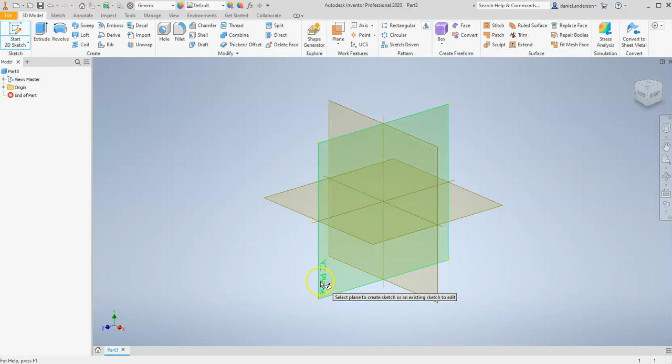So let's click on our New button and go to Standard Part. And once we're in here, let's click on Start 2D Sketch. And this time I want to start on my YZ plane or my side view plane. And I want to select my circle tool.

And I want to lock it right onto the center. I want to make it coincident with the origin. So you want to make that green dot happen. I'm going to click and drag, but I'm not going to click again. Instead, I'm going to type in a diameter of 1.5 and hit enter.

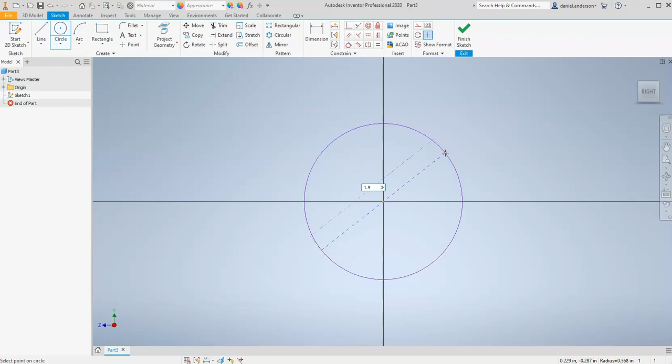And you can see that my circle is fully constrained already. I told it its size and I told it where to always be. I'm going to hit escape on my keyboard and I'm going to add one more thing to this circle. I'm going to find my line tool and I want to create a line that goes from top to bottom

across this circle. Now, before you click, if you let it hover, you'll see that little yellow dot sort of move in to a certain point in the circle. We call that the magnet feature. It's magnetizing to the top point of this circle. Make sure that you get that yellow point stuck to that and then click and drag down.

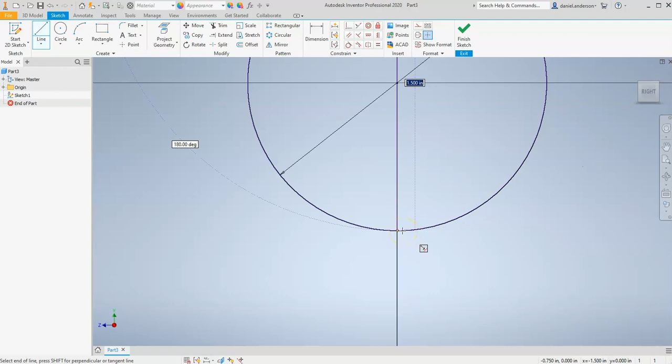And I want you to do the exact same thing at the bottom. It's very important not to let it go below and click. I want it to magnetize to the edge of the circle at the bottom and then click. And to center it, I'm going to click on my right view. And you'll notice that this line is not constrained.

So I'm going to hit escape on my keyboard. And whenever something's not constrained, I like to figure out why before I do anything. And so I click on it and I drag it. You can see why. I can move it from side to side. And so to fix that, I'm going to find my coincident constraint. And I'm going to tell this line to always be stuck to that center point. And I'm going to right click and hit OK.

And it looks like it's still not constrained. If I click on it, I can no longer drag it left to right. And so you might be wondering, well, why is it not fully constrained then? But if I select the top point of this line and drag it, you can see why. I can still rotate it. That is the last degree of freedom. To fix that, I need to add a vertical constraint to this line.

So if I select my vertical constraint and hover, you'll notice that when I hover over this line, the vertical constraint looks horizontal. This is kind of a weird rule in Autodesk Inventor, but whenever you're in the side view, the vertical and the horizontal constraints are sideways. And so if I select my horizontal constraint instead, you can see it makes that vertical dotted line.

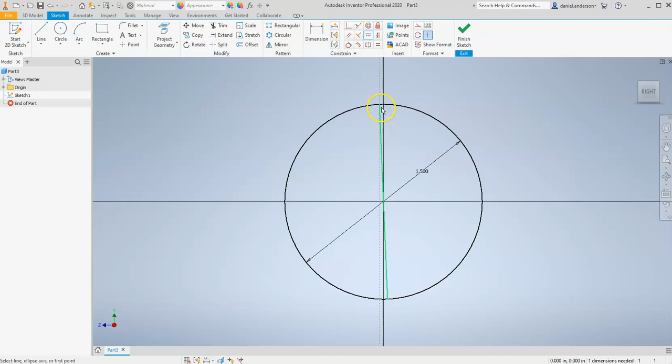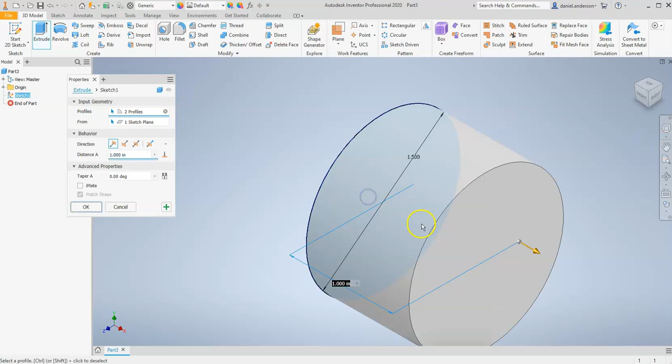And so I'll select that line with this, and you can see now that my line is completely vertical and fully constrained. And so from here, I'm going to finish my sketch. And I'm going to hit my home view to center this circle. And we could extrude this circle piece by piece, or the entire thing. But instead, I want to teach you a new feature. We're going to learn the revolve feature today.

So go ahead and click on that. And the first thing it wants you to select is your profile. So let's select a profile that we want to revolve. And all a profile is, is a shape. I'm going to select this one on the right. And I'm going to be very careful not to also select this one on the left.

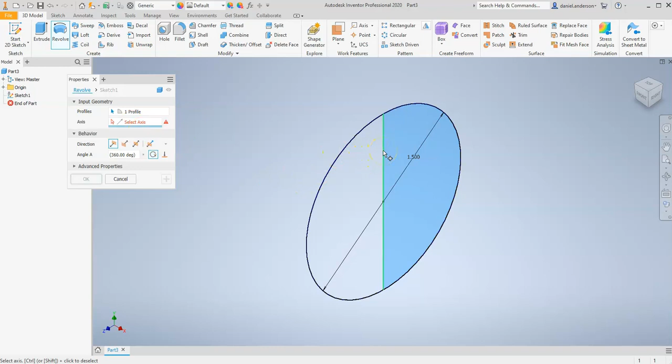Then I'm going to come over here and click on the words Select Axis. And I'm going to select this line as my center axis for my revolve tool. And if I click on it, you can kind of see what happens. It creates a sphere. I want you to click on that arrow and then drag it around. And you can kind of see how this works.

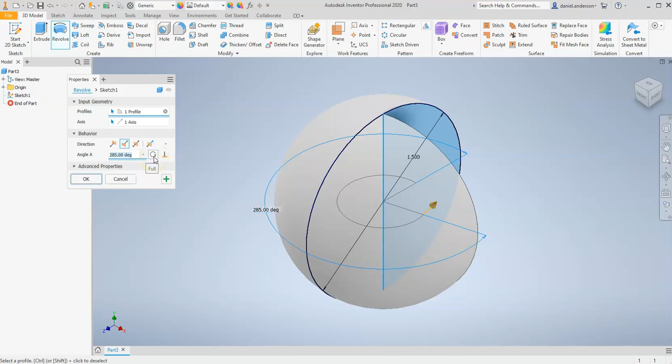It takes that shape, that profile we selected, and revolves it around that center line that we selected as the axis. If I revolve it the other way, you can really see how it works. But I actually don't want this to be an angle. I want to reselect Full to make it a full 360 degrees and hit OK. And we have a full sphere.

And if we want to make it look cool, we can go into our tools and go to Adjust. And I can select my sphere, and then I can choose whatever color I want it to be. And if I go here to the center, I can adjust the brightness and the darkness of that color. But even cooler than that, in my opinion, is you can go over here and select different materials for it to be.

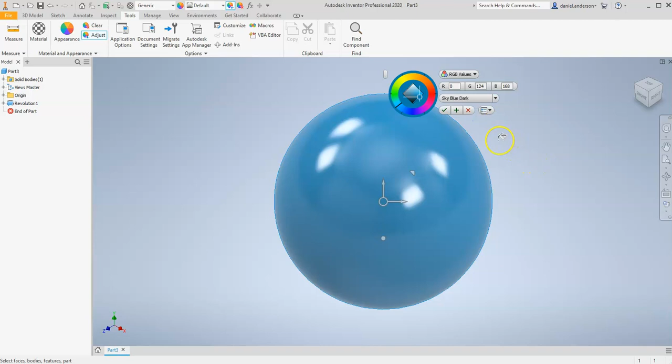So I can tell it to be some stone, or some wood, or zinc. And I'm sure there's some pretty cool ones in here. Let's see if I can find something really cool. And I like that one, that sky blue dark. So I'm going to go ahead and select it. And then I'm going to hit my check mark to confirm my adjust feature.

And play with it, have some fun with it. Make something that looks cool. And when you're done, go to File, Save As. And let's call this one Sphere. Or you can call it Ball, or really whatever you want, as long as you can find it in your project folder. And then we are done with this shape.